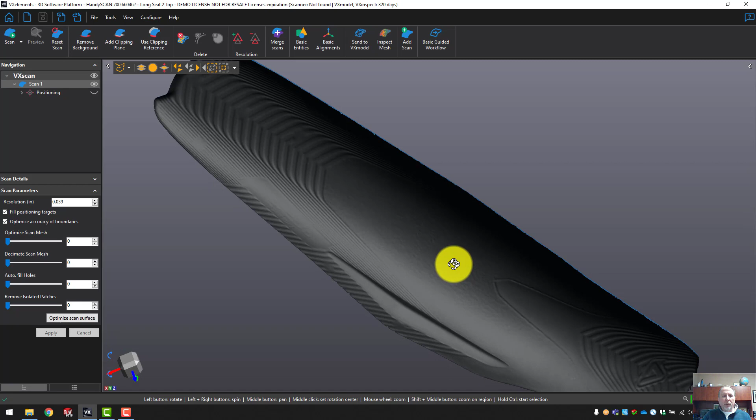In today's example, I've got a motorcycle seat that we basically scanned. What you'll notice about this motorcycle seat is that I scanned the top of the seat, and then I hit File, Save As, and I called it Seat Top. Then we started a new session in VXElement. We flipped over the seat, scanned the bottom, and said File, Save As Bottom.

So what I want to do is run through the workflow here today to do a simple merge. This is something that people do a fair amount of, and VXElement is built to accommodate this very quickly. I think it's very intuitive.

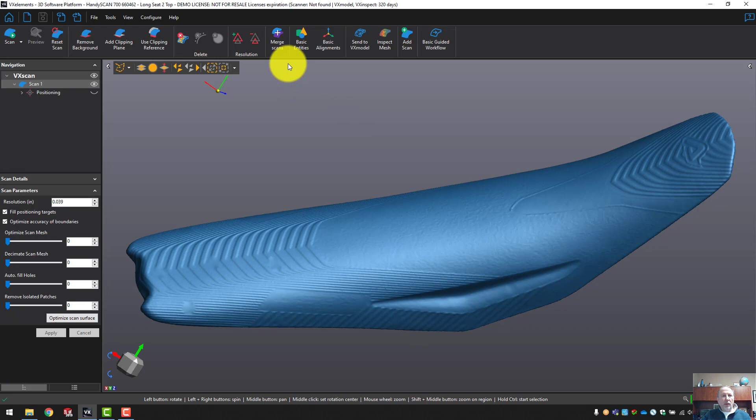So to start, we've got the seat top open. We're going to say Merge Scans, and we're going to add a scan, merge to the seat bottom here, and say open on that. So what we're doing now is opening up two scans into one session, and there are a couple of different alignments that we can do.

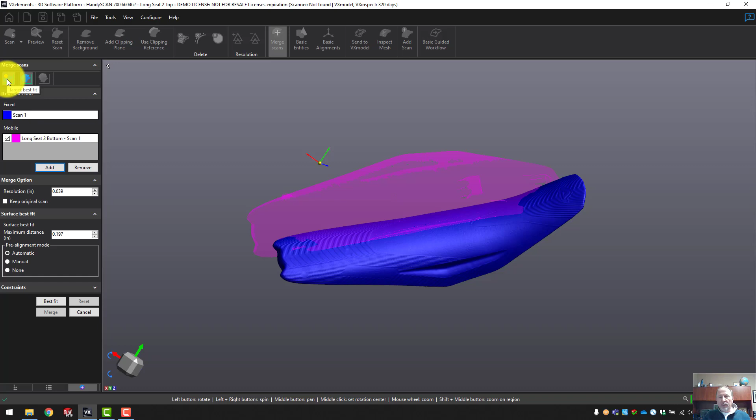We can do a best fit alignment, or we can do a target alignment. I use targets on these parts, and target alignments always are going to be the most accurate. So anytime you have an option to use targets, we would prefer doing target alignments. It's kind of like a datum alignment. So we're going to say go ahead and activate the targets.

In a target alignment, I need a minimum of 4 targets in common between the top of the part and the bottom of the part. It defaults to 4. We're going to say go ahead and align the part, so you can see that quickly it aligned the top and bottom.

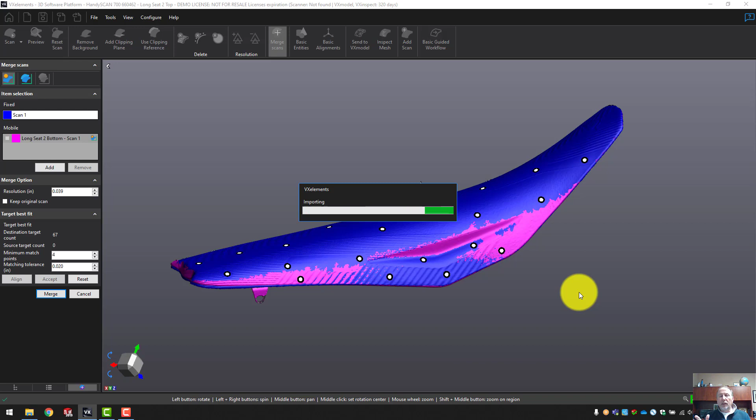That looks good, so we're going to accept that, and go ahead and merge those two scans together. By merging, what we're doing now is opening up a brand new VXElement session. We're taking the top and the bottom in the proper alignment that we just created, and merging that into a brand new session. Once we've got it into the brand new session, we can do some other downstream kinds of things with it, and that's what we're going to cover with you here shortly.

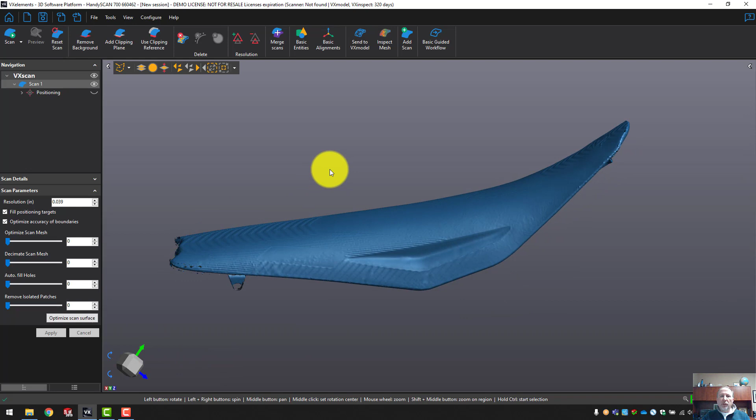Okay, now that we've merged the top and the bottom of the part, you can see that we've got the bottom, and it's connected to the top of the part. Looks good so far. So at this point, we're going to do some downstream kinds of things to it.

We're going to use VXmodel to do that. So VXmodel runs inside of VXElements. Basically, it's just a module, an add-on module for VXElement.

When I hit VXmodel, it gives me some other menu options. Let's run through some of the utilities in here.

One of the first utilities I like to show people is the Clean Mesh utility. It goes through my part, evaluates my scan, and finds any nonconformities that it can quickly and automatically clean up without any user interaction. I'm going to say go ahead and complete those. This takes a few seconds.

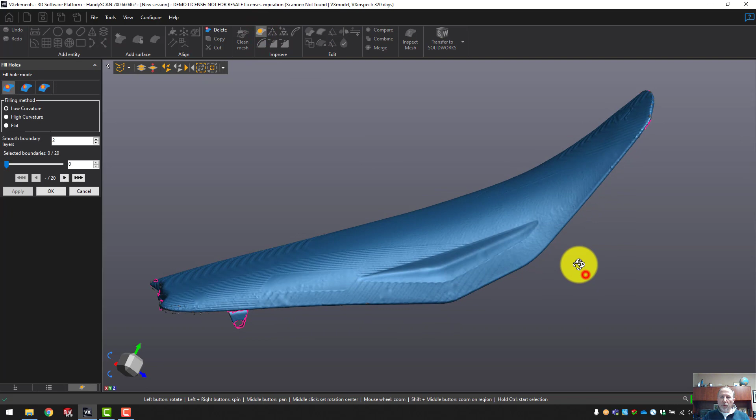After we get done with this, we'll take a look at the second utility I like to highlight, the hole fill utility. If I hit fill holes and rotate the part, you can see it's highlighted some areas that the Clean Mesh utility didn't take care of. Any highlighted areas with pink boundaries are gaps in the mesh.

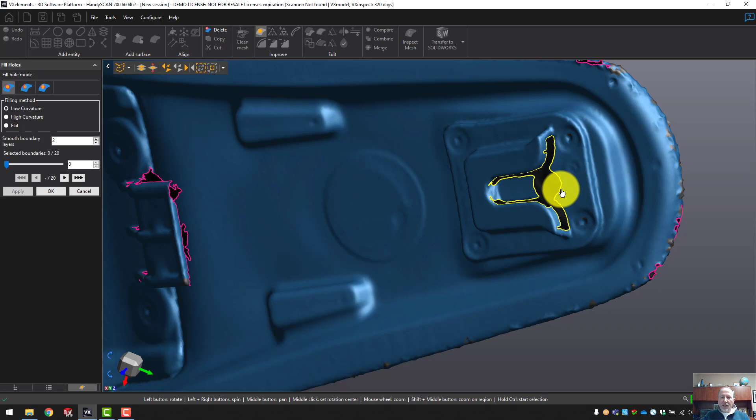To clean that up with the fill hole utility, there's a couple ways to do it - one automated, one manual. To show you the manual way first, I just click on the boundary once and it cleans that up for me. I click on the boundary here, it cleans that up, and so on. I can work around the part quickly and fill holes and gaps as I go.

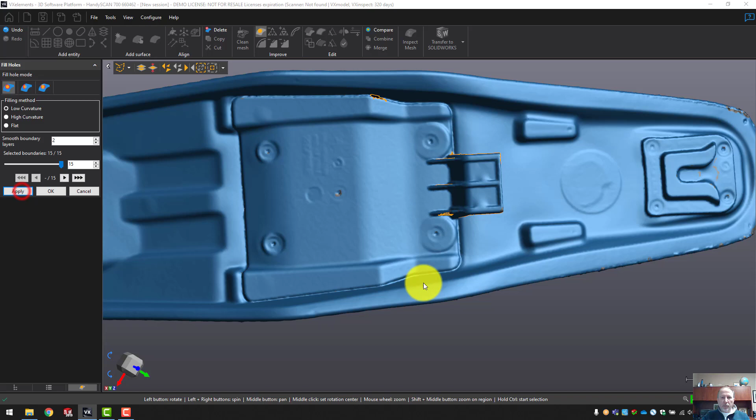Or to do it automatically, I just take the slider here on the left and say, well, there's 15 other gaps in the part - let's go ahead and apply those and automatically clean those up. And it's completed that, and I'm done.

Now I've got a part that should be watertight, and I can tell you whether or not it is. We have one button here that says watertight remesh. If I hit that, it says the mesh is already watertight. So what watertight means is that if I wanted to 3D print this on virtually any 3D printer, it's a watertight STL file. If I hit File, Export Mesh, you'll see that now I can output an STL file, which is a native format for 3D printers, as you may know.

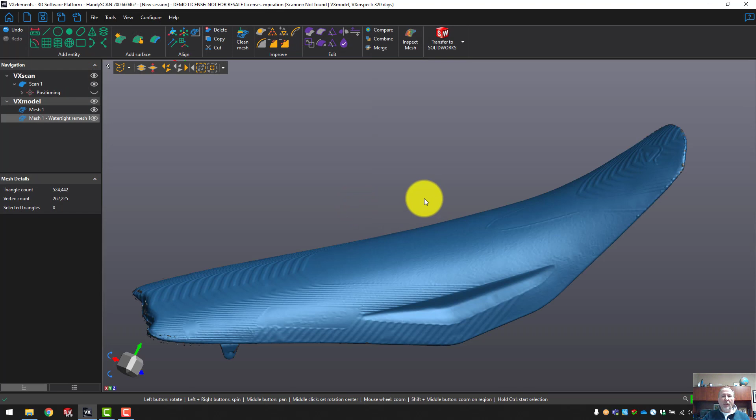Let's show you one other capability that has some appeal for downstream applications - the auto surface capability. We're going to say go ahead and automatically surface this part, and if I hit the preview button, this process takes about a minute or two, depending on the size of the part. Basically what we're doing is putting a NURB surface across the top of my part on both sides, and that NURB surface can then be output as an IGES or step surface to downstream CAD applications.

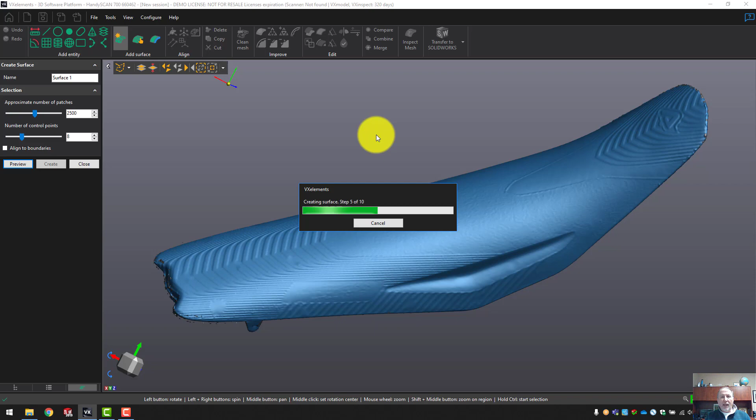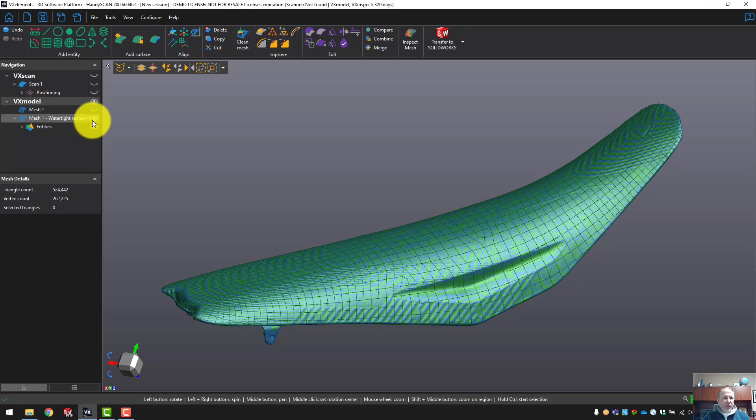Now we've completed the auto surface, and you can see that worked out pretty well. We can go and highlight that now to show you better what we've got. I'm going to turn off the scan and turn off the mesh itself, and we'll keep just the surface turned on.

At this point, if I say File, and Export the surface, all entities, I can export that surface as an IGES or a step file. I can also save it directly into SolidWorks or a variety of CAD systems. We support a direct link from VXmodel to SolidWorks, Inventor, or Solid Edge as well.